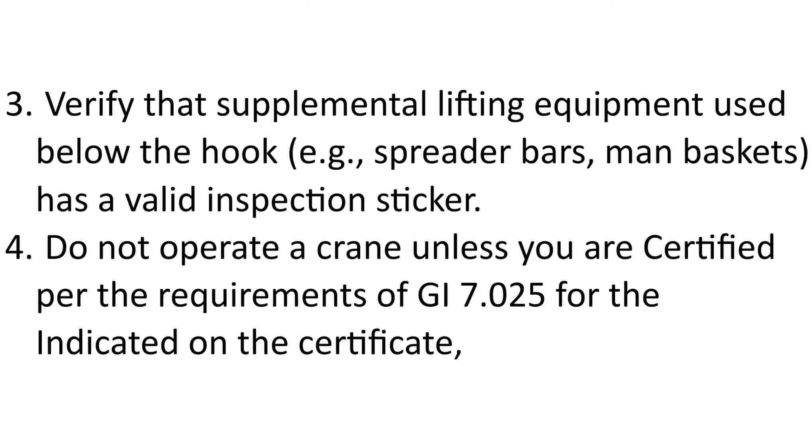5. Do not operate a crane unless you are certified for the mobile crane, fixed crane, or extensions and attachments type.

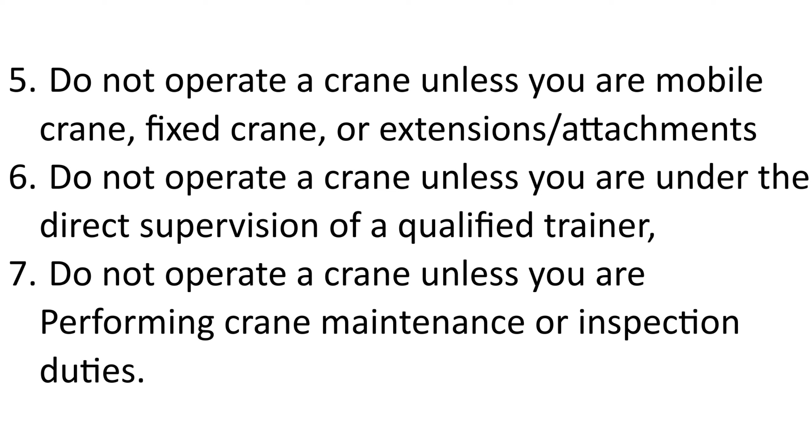6. Do not operate a crane unless you are under the direct supervision of a qualified trainer. 7. Do not operate a crane unless you are performing crane maintenance or inspection duties.

8. Communicate details of any crane lifts to the affected personnel in the area of operation. 9. Use universal hand or radio signals for communication between the designated signal man and crane operator.

10. Do not obstruct the crane operator's line of sight to the designated signal man. 11. Keep all cab glass clean without obstructions, e.g. curtains, cardboard, or damage. Cab glass must be safety glass.

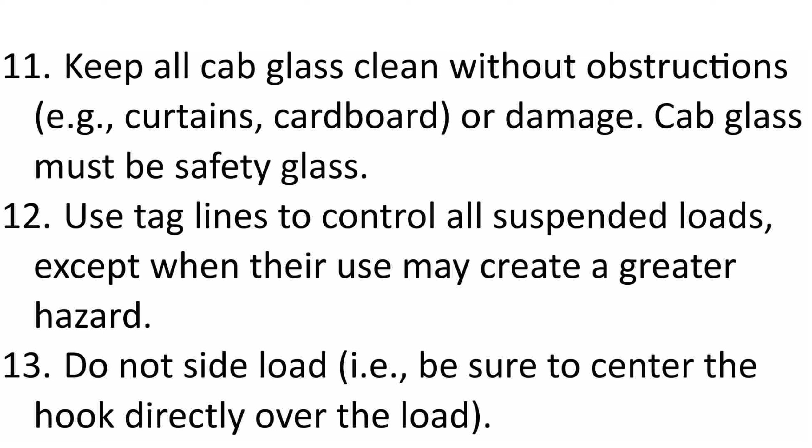12. Use tag lines to control all suspended loads, except when their use may create a greater hazard. 13. Do not side load, i.e. be sure to center the hook directly over the load.

14. Avoid suspending loads over personnel, equipment, or traffic areas. 15. Know the accurate weight of all loads and lifting gear prior to the lift.

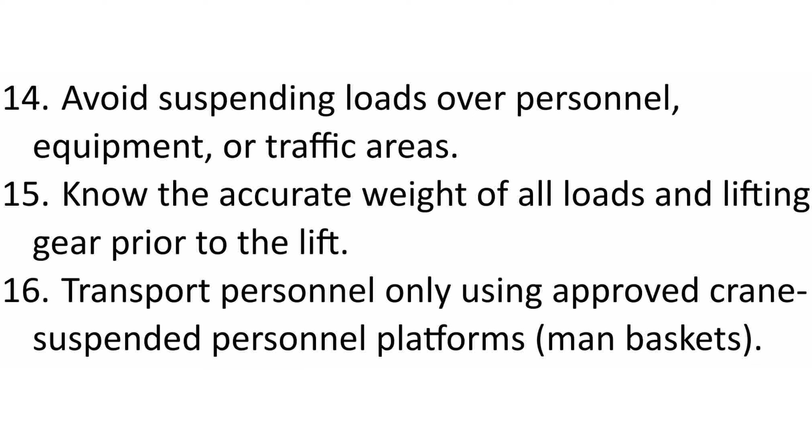16. Transport personnel only using approved crane-suspended personnel platforms, man baskets.

17. Use fully extended outriggers with appropriate float pads and mats when performing crane lifts. Do not permanently secure mats to the outrigger pads.

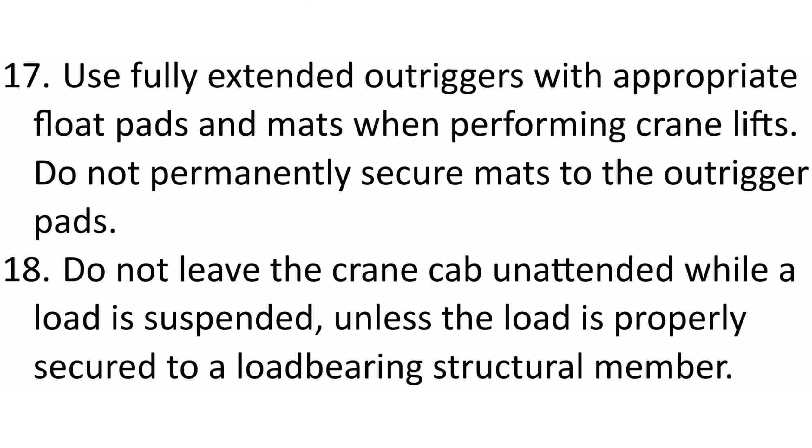18. Do not leave the crane cab unattended while a load is suspended, unless the load is properly secured to a load-bearing structural member. 19. Position, lower the hydraulic crane booms and secure the hook while traveling.

20. Do not perform crane lifts at wind speeds above 32 km per hour, 20 miles per hour, unless otherwise specified by the manufacturer.

21. Do not perform crane-suspended personnel platform, man basket, operations at wind speeds greater than 25 km per hour, 15 miles per hour. 22. Maintain the following minimum distances when conducting crane operations near trenches and excavations.

Depth of the trench or excavation for Class A soils. 23. 2x the depth of the trench or excavation for Class B and C soils. See the excavation and trenching safety topic for soil classifications.

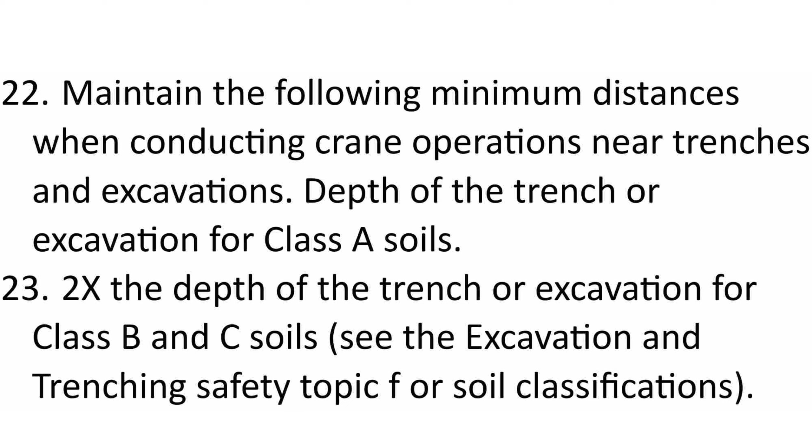24. Maintain the minimum distances provided in Table 2 in the electrical safety topic when operating cranes around overhead power lines.

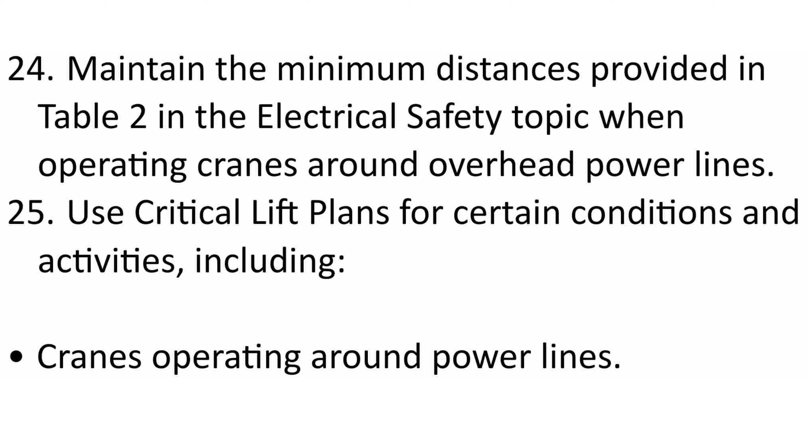25. Use critical lift plans for certain conditions and activities, including cranes operating around power lines, operating around hydrocarbons and above-ground pressurized piping areas, populated traffic areas, and railroads, all loads of 40 tons or greater.

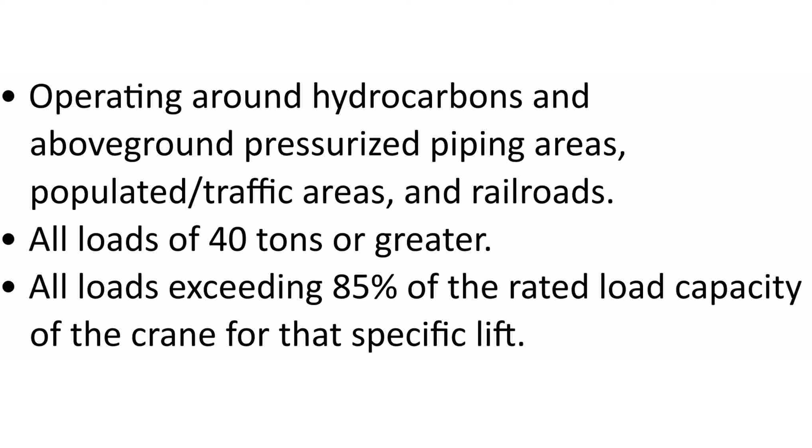All loads exceeding 85% of the rated load capacity of the crane for that specific lift, tandem, multiple, or tailing lifts, any lift requiring 2 or more cranes to lift one load.

Lifts involving a crane-suspended personnel platform, man basket. A crane-suspended personnel platform, man basket, permit is required for high-level and/or long-reach crane lifts.

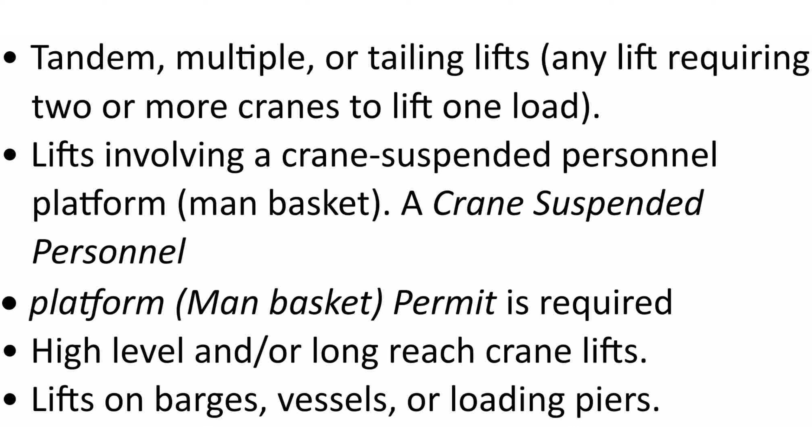Lifts on barges, vessels, or loading piers, on rubber or pick-and-carry lifts, nighttime crane lifts, except as approved during a turnaround and inspection, T&I, or shutdown, blind lifts. Other lifts as determined by Saudi Aramco management.

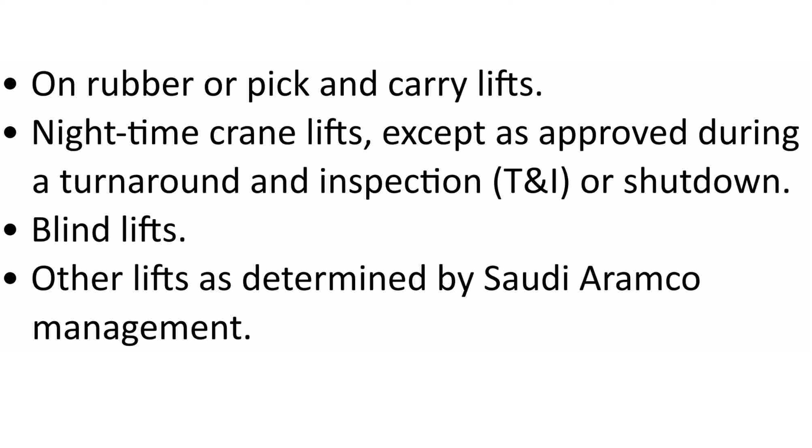26. Rig all crane loads using a certified rigger per GI 7.025. 27. Use accepted rigging techniques when lifting loads.

28. Use only rigging equipment that is rated for the load being lifted. 29. Avoid sharp bends in slings, and protect slings from sharp edges and abrasions.

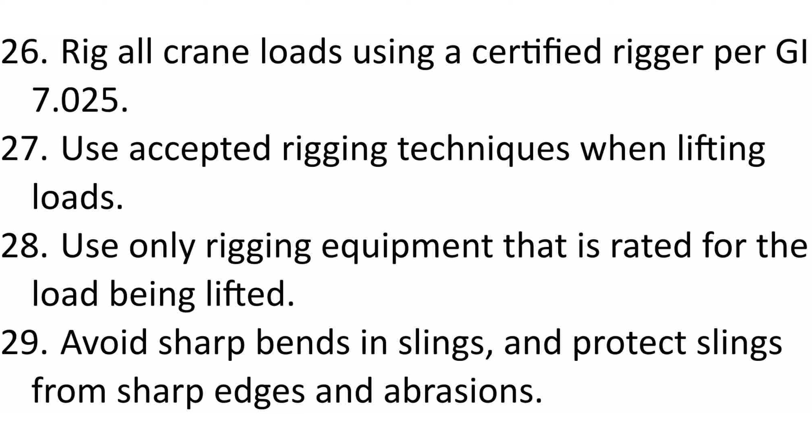30. Rig loads off load-bearing structural members only after prior approval. Do not rig from process piping.

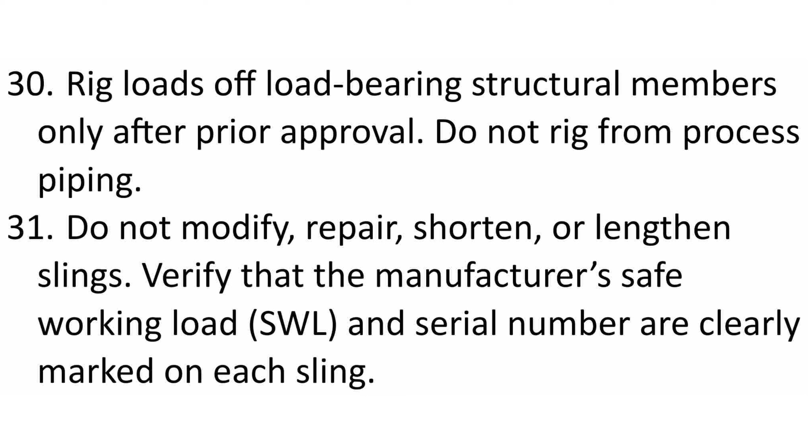31. Do not modify, repair, shorten, or lengthen slings. Verify that the manufacturer's safe working load (SWL) and serial number are clearly marked on each sling.

32. Do not use sling angles less than 30 degrees above the horizontal. The recommended safe working angle is 60 degrees above the horizontal.

33. Completely close bolt shackles and other connecting devices. 34. Do not use fasteners or other rigging hardware manufactured in-house.

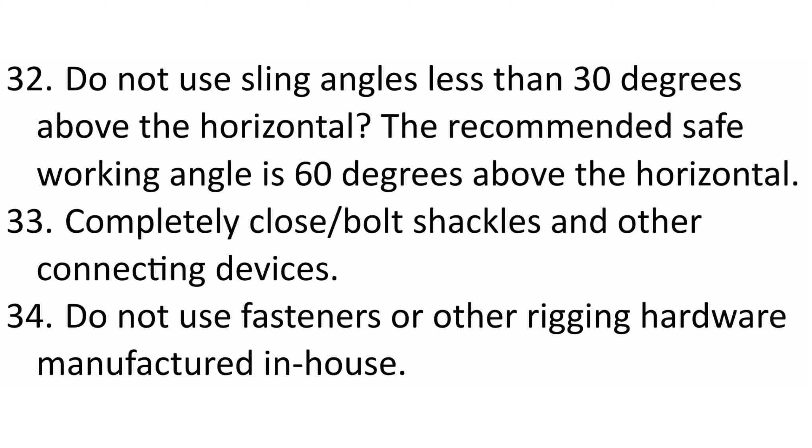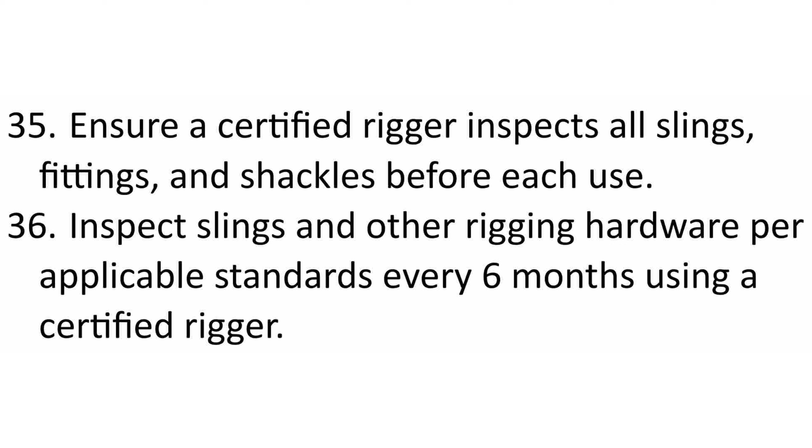35. Ensure a certified rigger inspects all slings, fittings, and shackles before each use. 36. Inspect slings and other rigging hardware per applicable standards every 6 months using a certified rigger.

37. Maintain a job site log of slings that identifies the sling and periodic inspection results. Record defective slings in the log and remove them promptly from the job site.

38. Inspect and certify all A-frames by a certified inspector prior to attaching any rigging equipment.